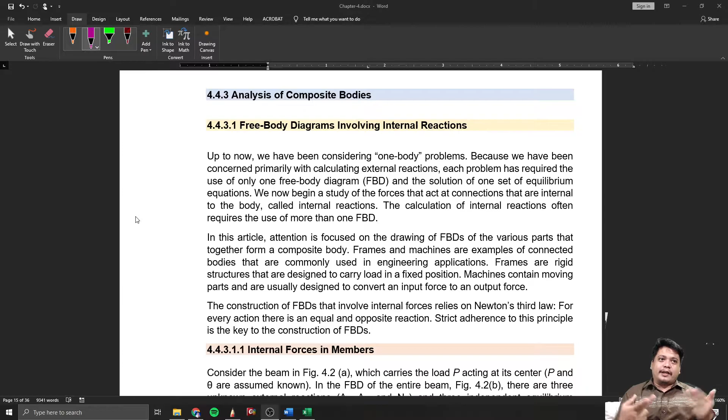Okay, let's start with the analysis of composite bodies. So, yung composite bodies, ibig sabihin nun, two or more rigid bodies na pinag-connect. Okay, for example, yung pulley natin kanina, nakakonekta sa isang rod, tapos yung rod nakakonekta pa sa isang rod, okay? By either pin connection. Okay. So, that's called the composite bodies.

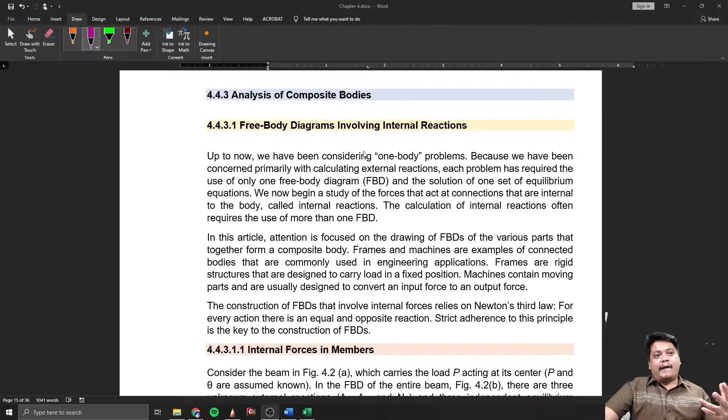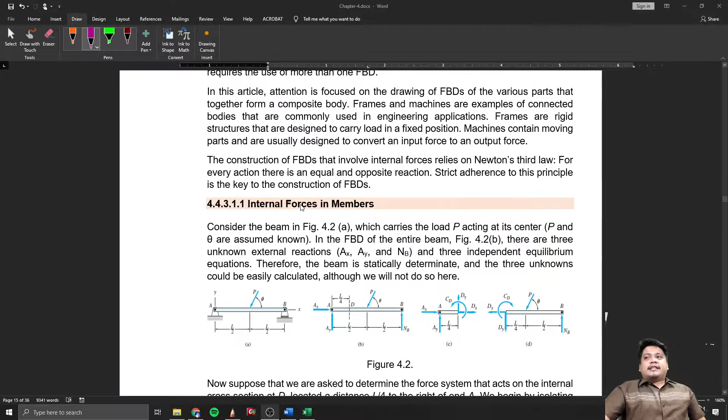So, free body diagrams, what you call the internal reactions, okay? Ulitin ko, yung internal reactions, siya yung reaction doon sa pinagdugtong na dalawang members. Okay? So, ngayon, meron tayong what you call the internal reactions. Meron tayong tinatawag na internal forces doon sa member. Okay? Yung tinatawag nating rigid bodies.

Okay, di ba sabi natin, we have the rigid bodies, kasi nga statics of rigid bodies. Kapag kinat mo yan, automatic na may expose ka ng tatlo kung rigid yan: isang force sa X, isang force sa Y, at saka isang moment. Kagaya nung ginagawa natin. So, it's either mag-cut ka kahit saan dyan sa member mo na yan. Basta isang buo siyang member, kinat mo siya kahit saan, tatlo yung ma-expose mo. Isang horizontal, isang vertical, at isang moment.

Example, kinat natin dito sa point D. Tapos, idodrawing ko yung free body diagram nung kaliwa. So, AX, AY, at point D, ito yung mga assumptions ko: DX horizontal to the right, DY vertical up, and then moment counterclockwise. Ngayon, given this free body diagram, kasi isang buo siya, pwede mong i-drawing yung free body diagram ng kalahati.

Ito naman siya. So, ganun din, except that dun sa point na pinagko-connect nung dalawa, tawag nga natin internal, di ba? Papasok si third law of motion. In every action, there is an equal and opposite reaction. It means kung yung horizontal dito is to the right, pagdating dito sa free body diagram, to the left na siya. If this is upward, pagdating doon, downward na siya. If this is counterclockwise, pagdating doon, clockwise na siya.

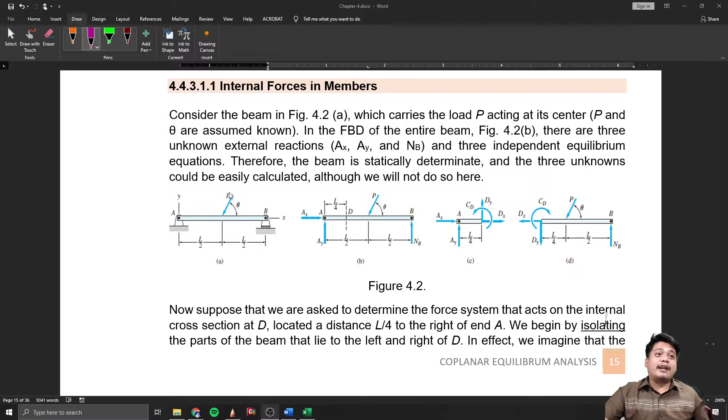Now, meron tayong tinatawag na internal forces at the connection, or tawag natin is internal reactions. Example, itong bar AB, isang rigid body siya, isang buo. Itong BC, isang buo din siya. Now, kung titingnan natin yung kanyang external reactions, ito lang, A and then C. Yung point A is pin, so technically, meron kang vertical and horizontal. Yung C, ganun din, meron kang horizontal and vertical. So, ito yung free body diagram ng buo.

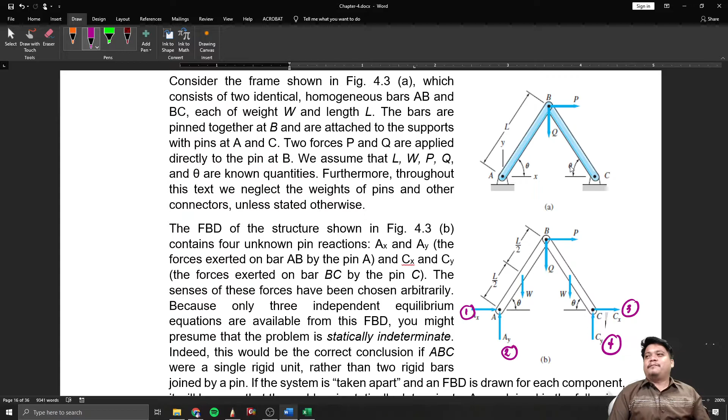Pero kung titingnan natin siya, sabi natin, the maximum unknowns para makapag-solve tayo sa statics ay tatlo lang. Sir, ito, ilan? Isa, dalawa, tatlo, apat. Sir, hindi na natin yan masosolve. That's already a statically indeterminate structure. At this point, yun pa lang kasi yung alam natin, tama yan that this is unsolvable. Pero, pwede natin siyang hatiin. Kinuha ko yung isang rigid body. So, itong rigid body, ilan yung unknowns dyan? Bilangin natin.

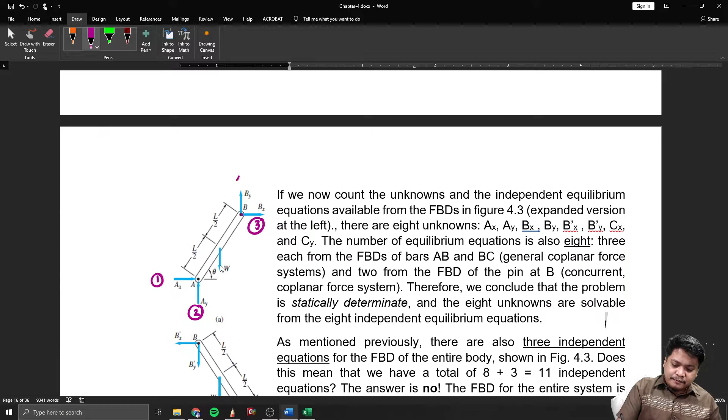1, 2. Kasi kinat ko doon, and that point B is a pin, dalawa rin yung unknown. Naku, lalo pang dumami. 3, and then 4. Dinrawing ko yung kabila. Pagka-drawing ng kabila, unknown sana to. Kaya lang, sabi nga natin, action-reaction, kung ano tong BX, ganun din tong BX prime. So, isa lang ang count nun, 4 pa rin yung unknowns. And then yung point C, since this is a pin, dalawa rin, pang 5 and pang 6.

Total, ilan pala talaga ang total unknowns? So, ang total unknowns ko is 6. Tatlo lang yung equations natin, tatlong equations kada member. Ilan yung member ko? This is member 1 and this is member 2. Total equations natin: yung isang member, may tatlo doon sa una, may tatlo sa pangalawa. Ilan?

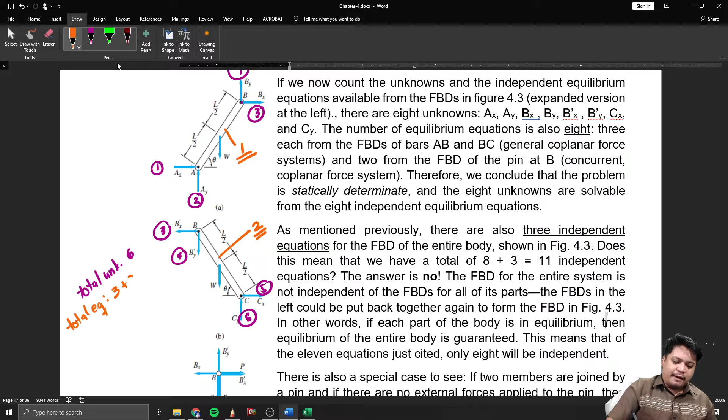6 din. So, pag minus mo yung total unknowns sa total equations, 6 minus 6, kapag nag-0 yan, that is statically determinate. Ibig sabihin, kayang i-solve yan ng statics. Kapag nag-more than 0 yan, it means hindi mo siya masosolve. Hindi na yun covered ng ating subject. Okay?

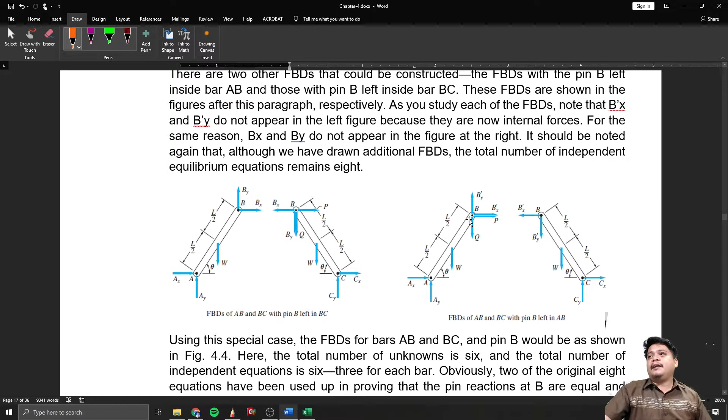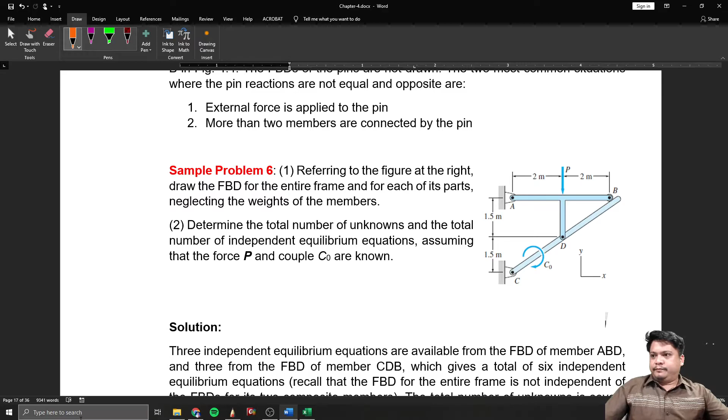Example. So, we will be having here this kind of example. Okay. Saan mo yun? Okay, wait for a while. Okay. Check natin to. Okay.

Referring to the figure at the right, draw the FBD for the entire frame and for each of its parts, neglecting the weights of the members. Determine the total number of unknowns and the total number of independent equilibrium equations, assuming that P and C are known. So, yung P and C known, hindi na siya bibilang sa unknown.